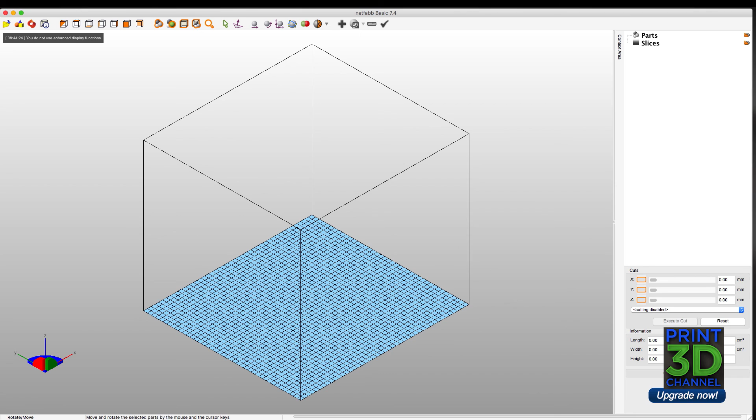Alright, so here we are in NetFabb. Let's bring over our newly created STL file. And it's going to give us that we have some errors.

The simplest thing to do is make sure it's selected, come up to this menu, do Standard Analysis. It'll tell you that there's some things wrong - surfaces closed, no; surfaces orientable, no.

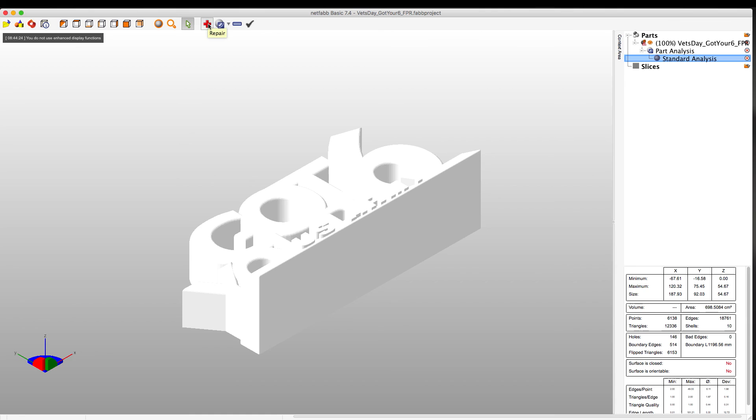All you want is hit the repair button. I usually hit Update, Automatic Repair, Execute, Apply Repair, Remove Old Part.

I know I went really quick through that. You can find out how to use NetFabb Basic online - this is a pretty simple program. Part is selected, I go Export Part to STL.

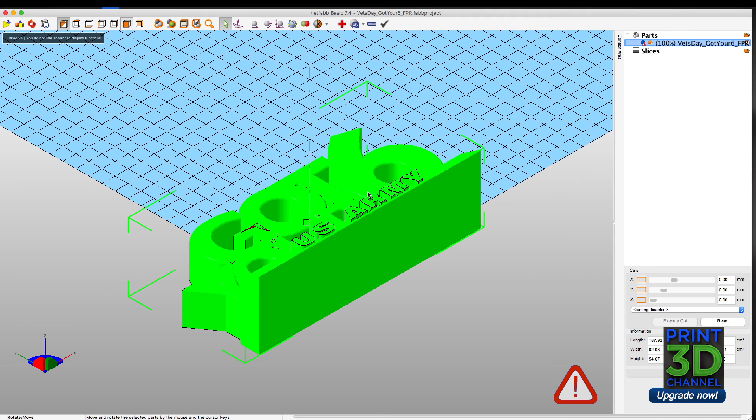It's going to call it Repaired. Let's put it in our folder. Let's optimize it - gives us a check mark. Export.

Here, let's quit out of NetFabb. We don't need to save this file.

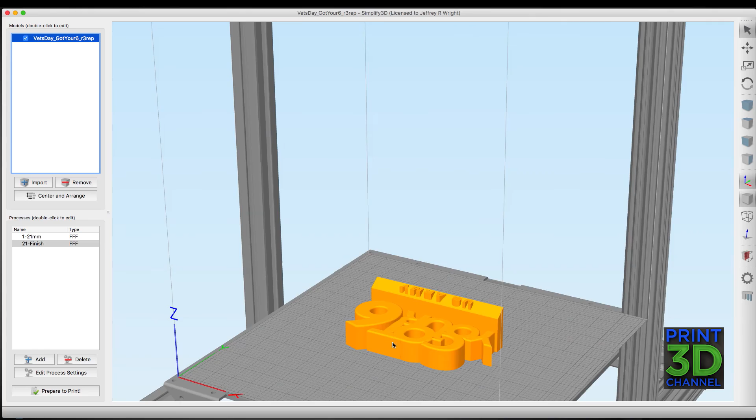Simplify3D - I've already went ahead and dropped in the model. So we've got it. I had to flip it around because it was facing the other way, and we want it to print on its back here like this. That's how I set it up this way.

So it has a pretty flat bottom here on the back, and I didn't want any curling because sometimes that happens with 3D printing. I also set up multiple processes because I didn't want the same amount of infill - I wanted a higher amount near those top layers to make sure they were nice and smooth.

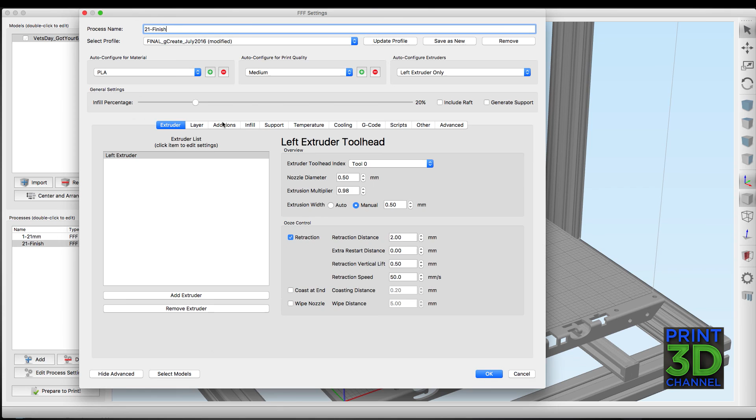So in the first setup I have a 10% infill and it stops at 21 millimeters. And at the second process the infill is 20%, starts at 21 millimeters.

Okay, so prepare to print, select all, hit OK. This will take a few seconds and we should be ready to print.

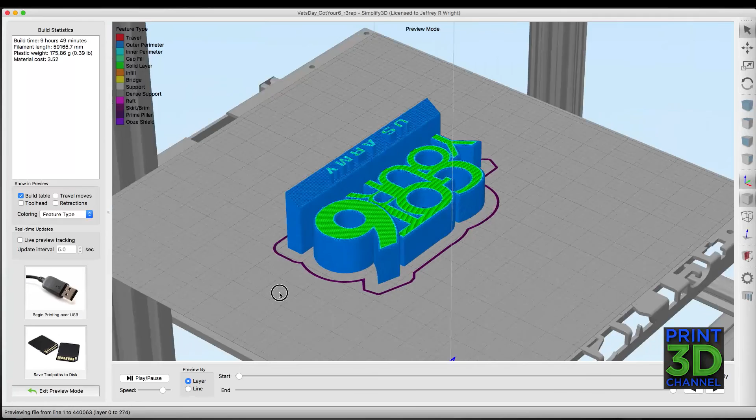Alright, so there's our preview G-code. That looks pretty good. It looks like we might have some issues here.

This type might not be thick enough, but we're going to go for it. We're going to see how it looks. It says it's going to take about 9 hours and 49 minutes. Let's go ahead and hit play.

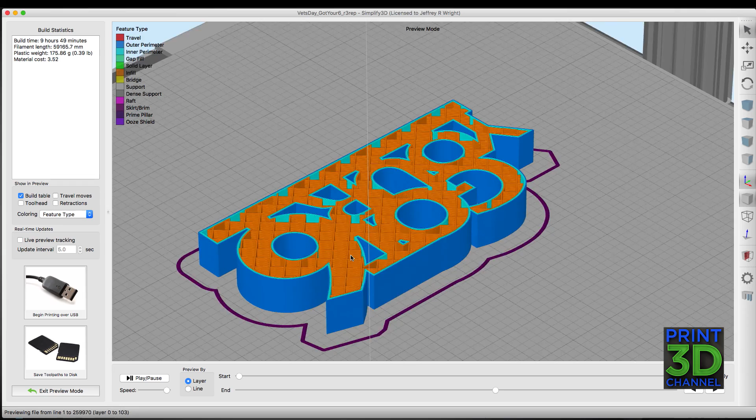And we'll speed this up just a little bit. And you can see where the infill changes over, finishing off with those top layers.

I'm also running 5 top layers on this, so it has a nice smooth finish on the top. So that should help out too. So okay, we're all set to print.

Let's go ahead and save the toolpaths off to the disk and head over to the gMax 1.5 XT Plus and get this printing.

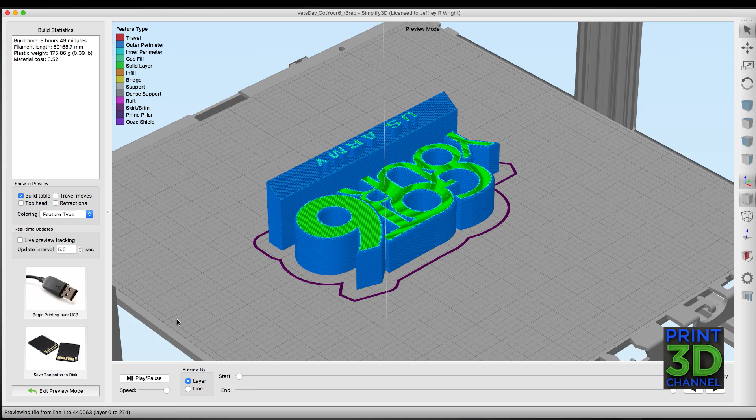Okay, so I have the SD card loaded up with our Got Your 6 model. Let's load up some of that MatterHackers PRO PLA in the color of gray and fire up the printer. I'll set up that time-lapse camera and I'll see you guys on the other side.

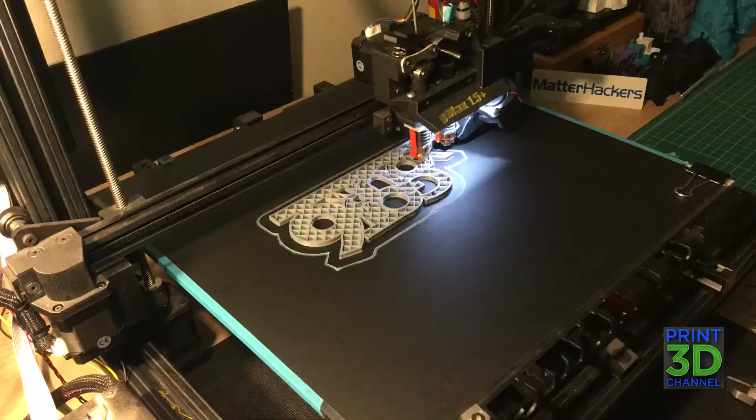Alright, as you can see, the print is done, but it took well over 9 hours and 40 some odd minutes that Simplify 3D said. In fact, it took almost 11 hours to print.

But nonetheless, it turned out awesome, and it's still on the print bed, so let's go ahead and take it off. I've got my trusty scraper.

There is some side curling going on the print, so this should be an easy lift off. So let's go ahead and do this. Yeah, it's coming up pretty easy.

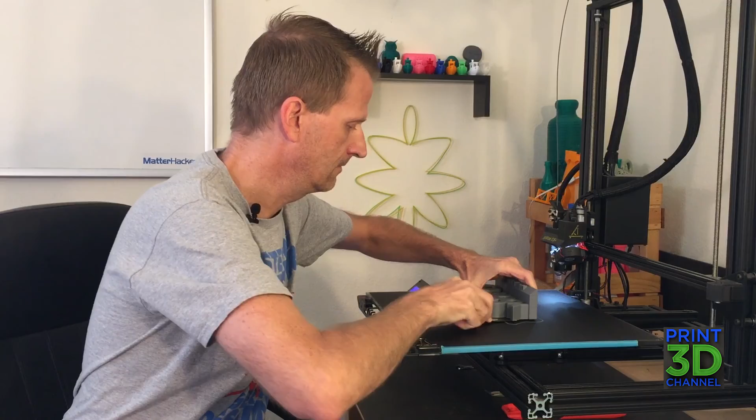Take a little bit of effort here. Let's go to the other side and see what we can do here. Cracking loose - and the part is free.

Awesome, there we go. Alright, that turned out great. I am really happy with this. I'll put some close-ups in at the end like I normally do, but this turned out awesome.

There is some what I call curl ripples, and that happens when the edges peel up from the print bed and it causes a little ripple. But since I printed it standing up, it should still have a perfectly flat base, and it does.

This turned out awesome. Alright, so it turned out pretty great. I'm pretty happy with the print.